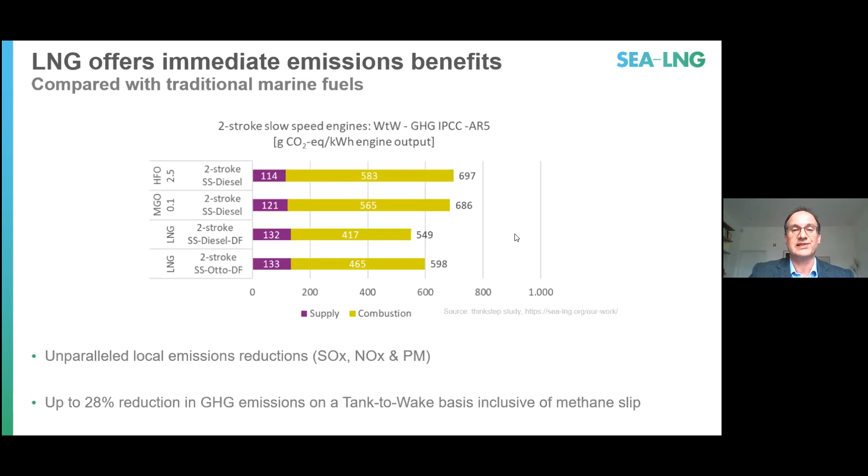But as we all know, regulation is tightening. On the international stage, the IMO, which is the body that regulates the global shipping industry, committed in April 2018 to decarbonisation targets consistent with attaining Paris temperature goals. So a 40% reduction in CO2 intensity for international shipping by 2030, pursuing efforts to about a 70% reduction by 2050.

At a European level, policymakers in Brussels are attempting to push shipping's decarbonisation even harder. So targeting a 90% reduction in greenhouse gas emissions from all forms of transportation by 2050, looking to include shipping in the European ETS, I think by 2023, and this is significantly in advance of any plans the IMO have for market-based mechanisms, and looking to incentivize a move towards zero-emission synthetic fuels such as hydrogen and ammonia.

So what's the role for LNG in all this? Our analysis shows that LNG plus ongoing design and operational improvements can meet the IMO's 2030 decarbonisation targets for new builds. So that's very positive news. But if we look longer term, as the emissions reductions targets become more stringent, then further reductions will require some form of lower carbon fuels. And this is where BioLNG is of specific interest.

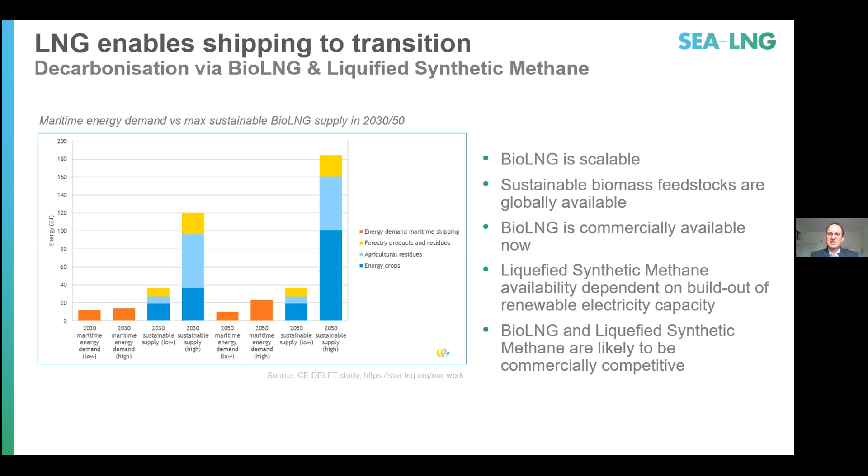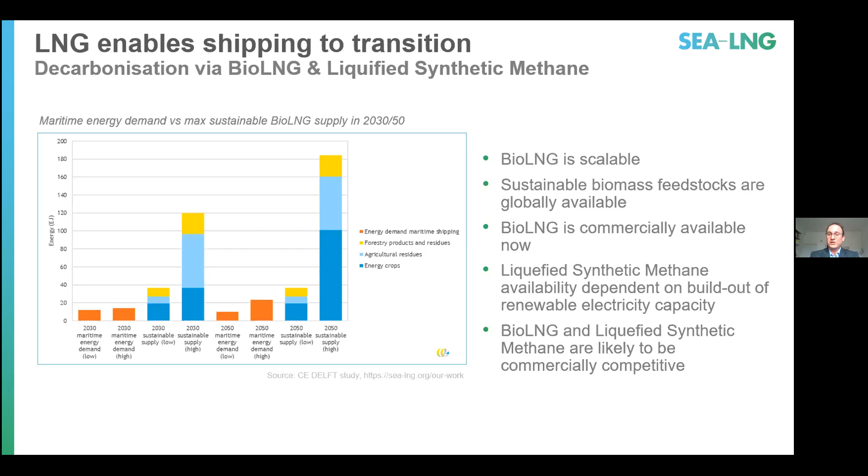Longer term, liquefied synthetic methane: the point that I want to mention here is the molecule is identical. It's available on the build-out of renewable electricity supply, as are other synthetic fuels such as hydrogen and ammonia. And then in terms of cost, BioLNG and synthetic LNG are very likely to be cost competitive with other synthetic zero emission fuels that are being discussed at the moment. So we've seen that BioLNG has a vast potential for shipping and clearly other sectors.

What needs to happen for it to realize its potential? Here are some general regulatory principles that we are promoting as an industry. We think clearly that regulators need to adopt a technology neutral approach so that we can guarantee a true level playing field between different mobility solutions. Alternative fuels need to be evaluated on a full life cycle, and for shipping that means a well-to-wake basis. There's a lot of discussion about hydrogen and ammonia as alternative fuels, but if those are simply produced from fossil fuels, then they will have higher overall greenhouse gas emissions than conventional marine fuels such as LNG.

Regulators need to effectively recognize and incentivize the role of BioLNG for shipping's decarbonisation, and more generally point biomethane at those harder to abate sectors where there are no obvious alternatives, such as electrification through solar and wind power. We need to bring more sustainable feedstocks into the scope of Europe's Renewable Energy Directive, such as residues that can't currently be used and secondary crops.

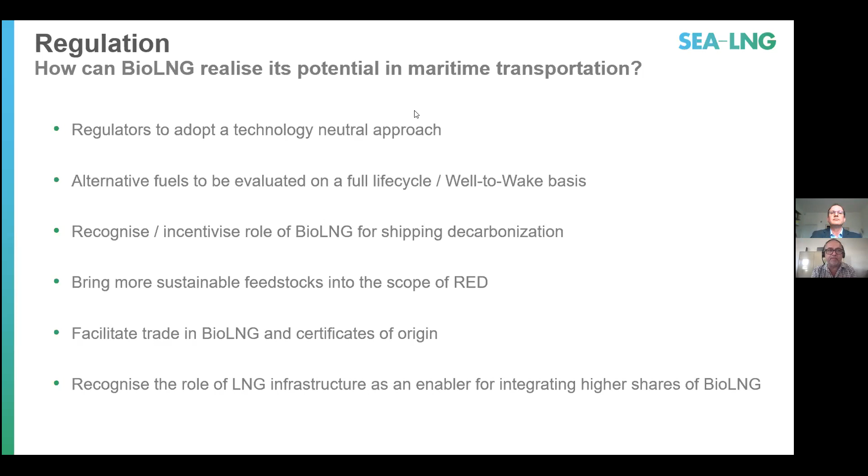So now that leads on very nicely to Michael Schopp, who is the commercial director for marine at Titan LNG, and can give us his point of view and his experience from actually handling LNG and how he also sees BioLNG fitting into the equation for the future. Okay, Michael, I'll hand the microphone over to you.

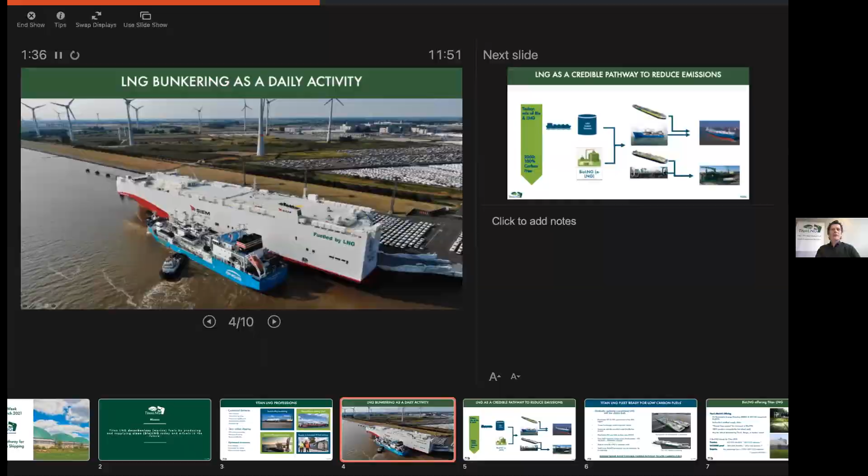Michael, excuse me, I'm just going to jump in here for a second. Would you be able to just launch the PowerPoint from the icon at the bottom of the screen so that we get the full picture? Like you're doing a full screen. Yeah, I was doing that. Is it better now? Well, we can see the notes as well. Okay, that looks almost there. Try again. Sorry for this. That's all right. If you click on share screen at the bottom, it should give you the options of different screens. Sorry. Don't worry, that's not a problem. Otherwise, I can bring it up if you like.

I seem to have lost it completely now. I'll pull it up because we have it, of course. Sorry, I'm working on two screens. Okay, are you there? It's just opening for me as well. Sorry to interrupt you like that. I'm not even sure where my entire PowerPoint went to. Maybe let me bring it up for you. Then you allow me to take the screen and I'll launch it myself. So I stopped sharing. Okay. What can you see? Can somebody confirm that we can see the full screen?

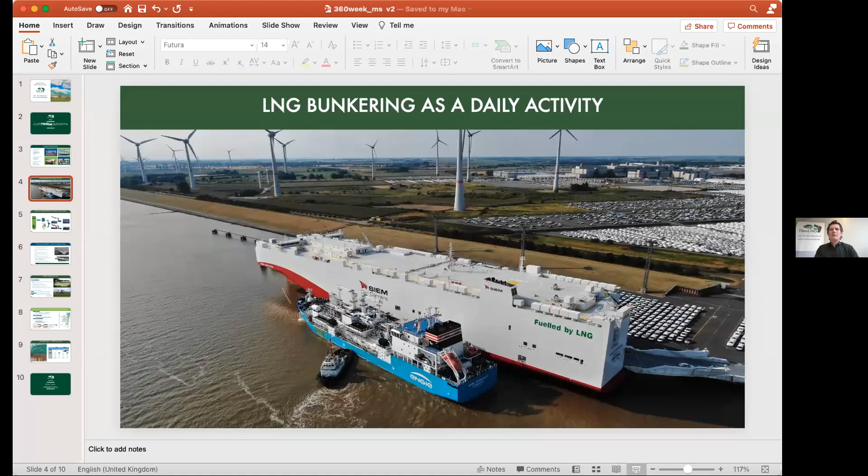Oh, I can see mine again. Okay, shall I try to share mine again? I think we're good now, Steve. Sorry, Michael. So can you see the screen or not? Yes, but it's not on full screen. Shall I try once again? Let's do that. Perfect. So share screen. PowerPoint. This one. Share. And there we are. Well done. Thank you, everybody, for your patience. Over to you again, Michael. Hopefully it's okay now. My apologies for that. So where was I?

And we have started to supply LNG as a marine fuel for the last 5 years, developing various propositions for small scale, which is also applicable for bio LNG. I will explain that in a little bit. The truck-to-ship bunkering, which is more for inland vessels. We have bunkering with dedicated inland waterway bunker barges, and we have the larger scale ship-to-ship bunkering for ocean-going vessels at various locations. We have now brought on board a team as well, looking into the bio LNG proposition.

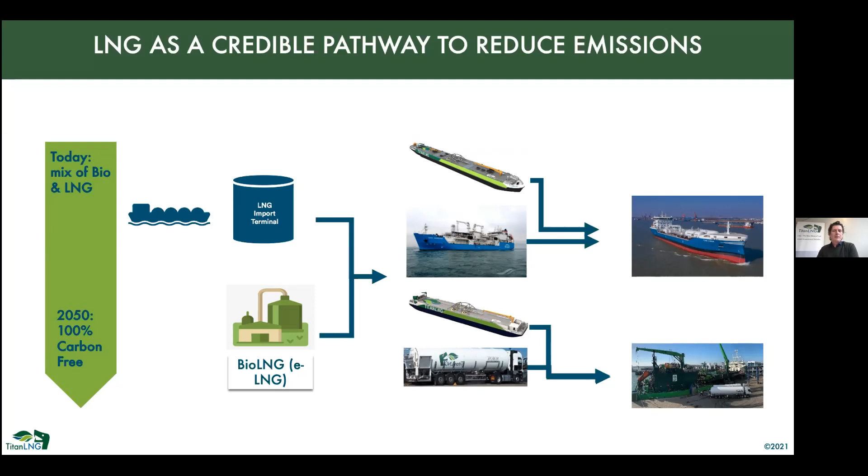And so a government gives the contract to this green, literally green vessel on the basis of their carbon footprint performance. Once it is of scale, we start including it into the larger assets that we currently have on the water, and start supplying it to the larger vessels that require a real ship-to-ship transfer, because the trucks are just way too small.

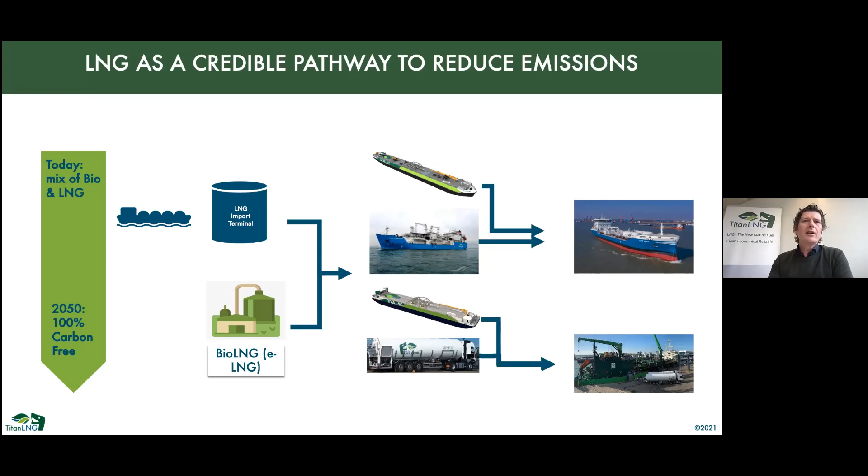The beauty of the LNG infrastructure that is currently there. On the top right side, you can see our two barges really next to each other. The Flex Fueler 2 has been christened one hour ago, so she's officially in operation. The beauty of these barges is that they have multiple tanks on board. So the idea here is that we start allocating storage capacity inside our barges to accommodate physical bio-LNG streams. This has also been recognized by the European Union, that this concept is actually quite workable to scale up the bio-LNG delivery promise to the marine market.

The Flex Fuelers, because they have the four tanks, can accommodate these bio-LNG streams via trucks. So trucks can discharge into our barges, and then we can bring it to the vessels that require LNG as a marine fuel. That application with the trucks sounds a little bit difficult, but it is a way to scale up with the market, because you can't start discharging trucks into large vessels for the bio-LNG. So the Flex Fueler is a very nice intermediate storage solution where you can aggregate sufficient volumes that can be brought to the final receiving vessel.

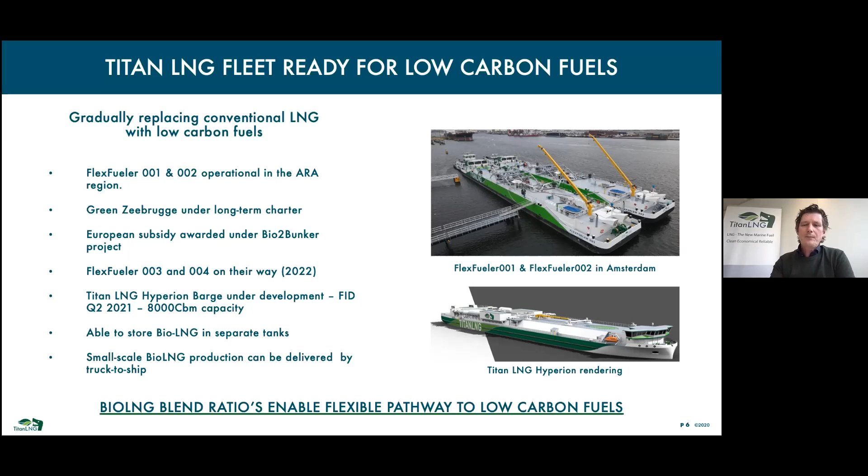So what do we do on the bio-LNG? Of course, we want to be on the forefront of making sure that we end up delivering the right products to our customers. For that, we have taken great effort to make sure that we have all the certification in place, end-to-end certified for the entire supply chain. Also, we've intensively looked at the compatibility. So conventional LNG with bio-LNG, how can that be mixed? In other words, how compatible is it? We have not found any issues on that, and the engines of our customers should be able to accommodate these bio-LNG molecules safe and sound.

So how do we start to bring up this blend ratio? That's by offering tailored solutions in accordance with the needs of our customers. How much bio-LNG would they like to introduce into their fuel mix in order to offset their emissions? So we can go from what we call a B10 to 100% bio-LNG, depending again on the customer needs.

In order to be a credible supplier, we've taken the steps to make sure that we have the end-to-end process in order, and we have recently obtained the ISCC certification, which we're quite proud of, and therefore give our customers comfort that they will get the right product on board, and that they will not be faced with any issues after delivery has taken place.

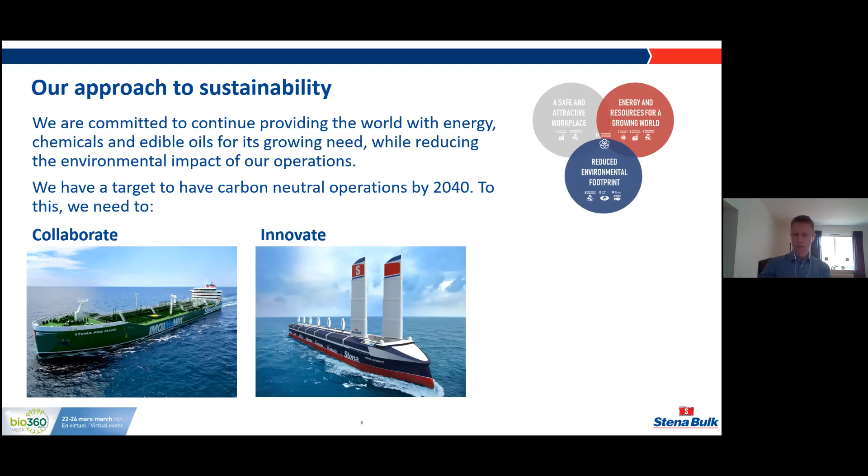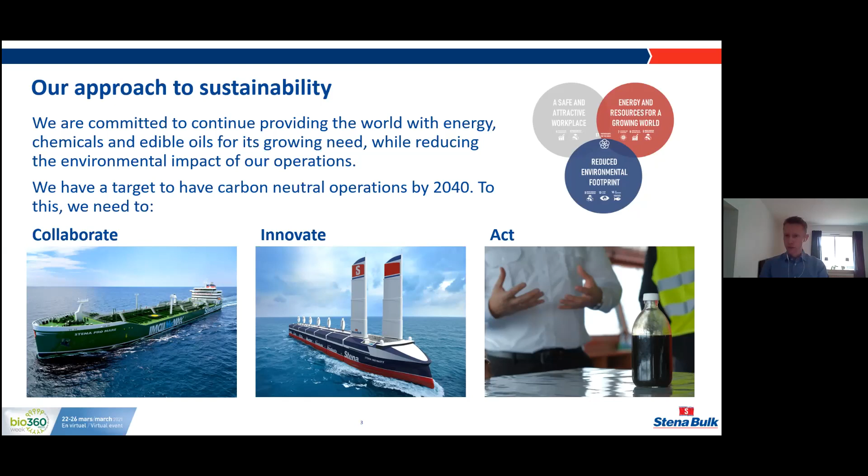And all of this is going to be needed, we believe. But there's one really, really critical thing that remains, and that is that we need to start acting now. We can't really wait for new technology and new zero carbon fuels to be commercially viable. We need to see what we can do now with the fleet that we have in the operations that we're currently in. And that's really where we see biofuels fit in very nicely.

This is the Stena Immortal, one of our product tankers carrying oil products and chemicals and vegetable oils around the world. But she was also the first vessel that we ran on biofuel. This was about a year ago. We did a trial on a 10-day voyage from France to Rhode Island. And what's so special about that? We're not the first one doing a biofuel trial, certainly not. We wanted to stretch it a little bit.

We did it on 100% bio, and we also did it in regular commercial operation in fully loaded condition, meaning that we didn't really change anything from our regular operation. We didn't take the ship off hire and do a separate trial. We did the trial as part of our operation. And the point of that was that we wanted to prove that for us as a ship owner, the only difference between biofuel and conventional fuel is the environmental footprint. That was kind of the whole point. We shouldn't have to change anything else to be able to run on bio.

That was the approach. Of course, supervision and testing, a lot of that we did, but otherwise we didn't change much. The conclusion was that, yeah, that was exactly the case. There was really no difference. The engines performed on par with conventional fuels. There was no tear. There were no residues or soot coming out of the exhaust. We didn't have to change anything operationally. We did a second trial a few months after on a different fuel, a blend that time, to try that out as well, and the conclusion was the same. So for us as a ship owner, we are very confident that biofuels work.

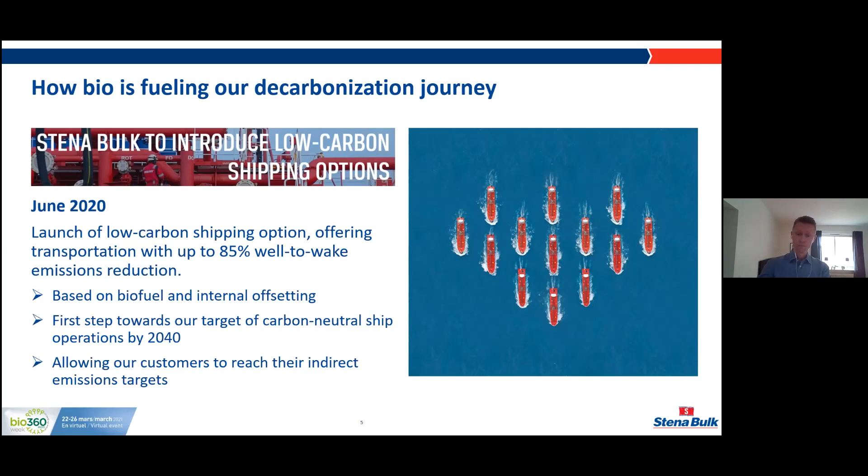Peter, thank you. Oh, sorry. No, I'm not done yet. I just had an artistic pause.

I want to talk a little bit about methanol as well. We do believe in methanol as a fuel, and as I mentioned earlier, we have the collaboration or the partnership with Proman. There are a number of benefits with methanol as we see it, but if we stick to the environmental side of things, it is biodegradable. It is clean burning in the sense that the SOx and the particulate matter is reduced dramatically, and also NOx levels.

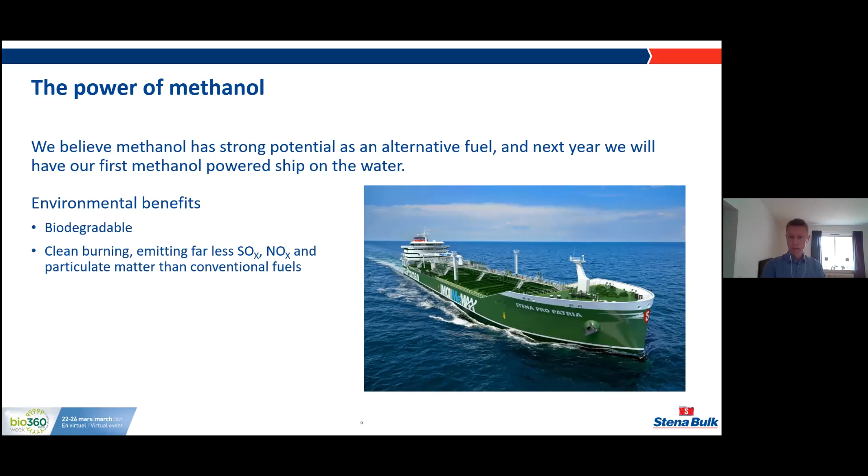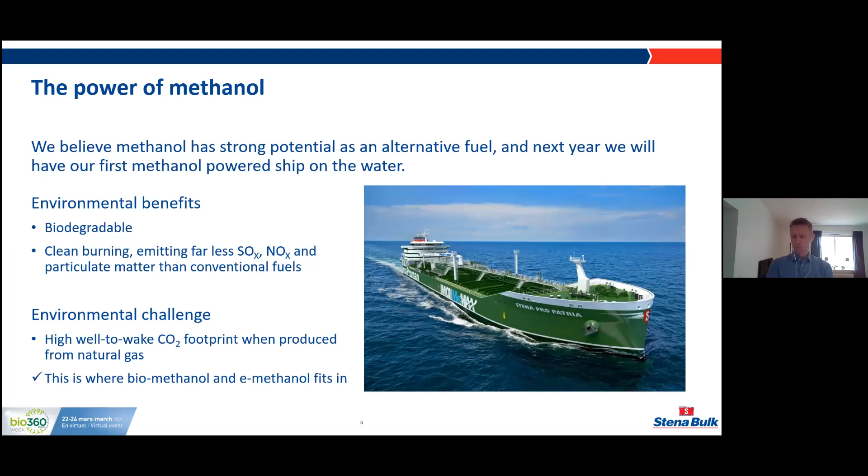The challenge from an environmental perspective is the carbon dioxide. We know that there is less CO2 emitted from combustion of methanol compared to other fuels, but over the life cycle, it's still significant. And this is really where bio and e-methanol fit in. And the way we approach it is when we look at alternative fuels in general, we try to look at it in pathways. So not looking at methanol and biomethanol and e-methanol by themselves, but seeing it as a whole.

And doing it that way means that we can start investing in methanol ships. We can start and build operational and technical experience, because we know that methanol is solving a number of problems for us now, and will solve even more problems when we eventually can scale up the bio and synthetic methanol. And same thing with methane or LNG, as discussed by the previous presenters.

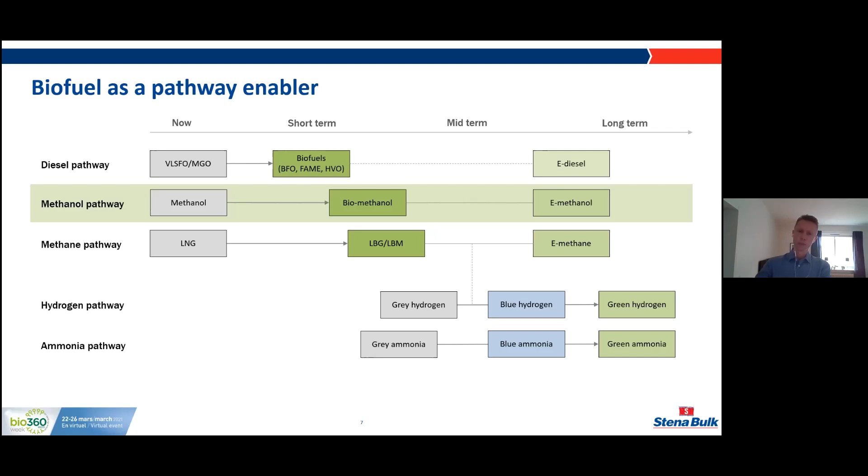So in conclusion then, when we talk about biofuels as an enabler, it's primarily three things that we're talking about. One, it allows us to act now. We don't have to wait for new technology or new fuels to be commercially viable. We can start reducing our emissions now. And we can't, to be fair, really afford to wait 10 years or 20 years to start that voyage. So I think bio is playing a key role in that respect.

It also opens up for multiple low carbon pathways, as mentioned. Methanol is one, LNG is one, which means that we can start taking active steps now. And then finally, I think biofuel actually has an important role to play in that it shows that decarbonization isn't 10 or 20 years away. It's something we can do now. And I hope that can also push development and investments in other options when it comes to low carbon technology and fuels as well.

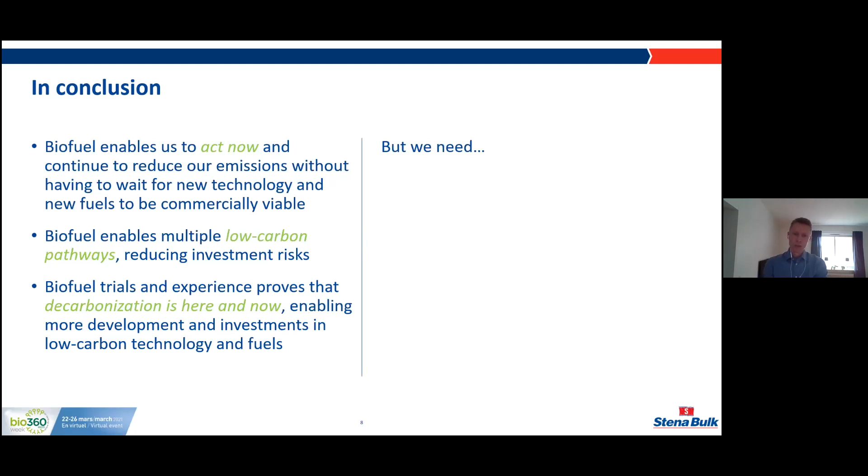For it to really take off though, and now I'm not talking about Stena Bulk specifically, but more in general for ship owners to start looking more into bio, there are a few things that the industry will need, I think. I like to talk about shipping appropriate products. Of course, we need more products. We need more fuel available for us. When I say shipping appropriate, I mean that we need products that are high quality, but not necessarily fancy. Right? Our engines can take a lot. We need quality, of course, but we don't need HVO.

And that, of course, also has to do with pricing. Pricing and also availability, I think, are key concerns, not only for us, but for others as well. Can we really rely on having enough to be able to continue our operation running on bio? Same with certification. Happy to hear that Titan LNG now has certified their products. I think that is really, really important, and standardization as well. That also leads into the regulatory clarity that is also not quite there yet, I think. Especially the question of what is regarded as sustainable and what is not.

So those are a few things that I think we need to continue to work on together, and we are happy to collaborate with anyone around those things as well. But again, the potential is there, and we're going to focus continuously on bio as one of the pathways moving forward.

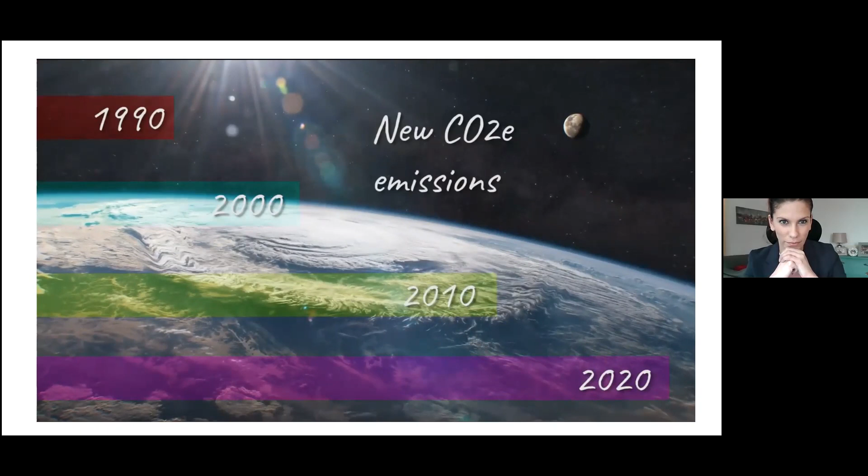A domestic flight, for each kilometre travelled, for every economy passenger, will release 250 grams of new CO2e emissions. That's a single passenger travelling just 1 kilometre of a single flight. Last year alone, humans released 43 billion tonnes of CO2e emissions into the atmosphere, and it's growing fast. Once-in-a-generation storms occurring annually. Record forest fires sweeping across our rainforests. Up to 150 different species becoming extinct every day.

In the future, the world must transition to carbon net zero energy forms. But tonight, from midnight, those 100,000 flights will still depart, and 75,000 cargo, cruise and fishing ships will continue to set sail. So, what if there was a solution to clean them all from tonight? What if we could take the 8 million tons of waste plastic destined for our oceans and turn it into an ultra-clean fuel that reduced CO2 emissions by 75% and zeroed out the sulfur oxides? What if there was an immediate solution?

So welcome to Clean Planet Energy, and a couple of important points regarding this video. First of all, I think we are all aware of the emissions that are associated with transportation. And this is why we're all here providing solutions to both industries, the aviation and the marine sector. But also it's very important for people to realize and understand the importance of global trade, and that it has to continue with as little disturbance as possible. And this is why it's important to provide both industries with immediate solutions.

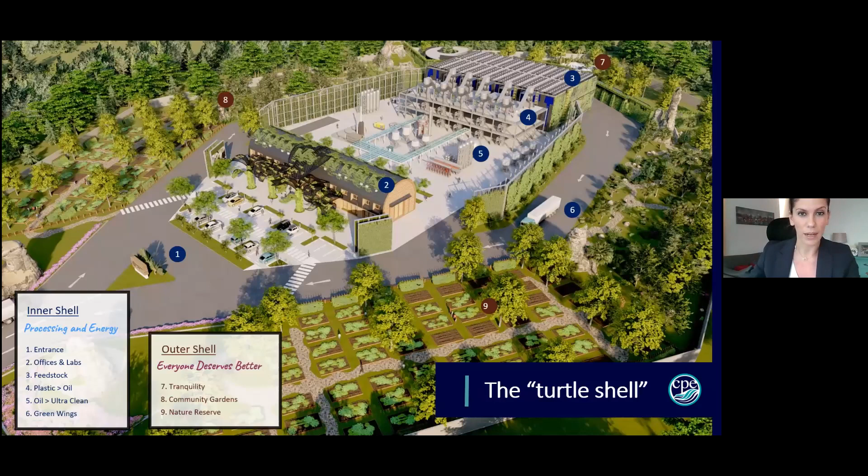Now, our eco-plants are built using our trademark design, the turtle shell. The turtle around the world is associated with good health, long life, and nature. And these are the qualities that we strive for with each of our eco-plants. And I hope you will see from the designs here that the way they look and feel is so much different from the traditional plants that people are used to seeing.

Now, the inner shell is where all the magic happens, where we have our processing facilities and the energy. And the outer shell, which is 30% of our investment, is all about nature. So we build gardens, tranquility gardens, community gardens, nature reserves. And the reason why we do that is that when we go and talk to the local authorities about building eco-plants, we want them to be part of the solution. And that's the reason why we build them so different from the traditional plants.

So how it works. Every day, each plant will use 60 metric tons of non-recyclable waste, which is going to be shredded and fed into the facility. And within our facility, we have a two-stage process. In the first one, in an oxygen-free environment, the plastic hydrocarbons are broken down into smaller chains. And then in the second part of the process, those chains are upgraded into new products. And at the end, we have liquids, gas, and solids. The important thing I want you to remember here is that this is not incineration.

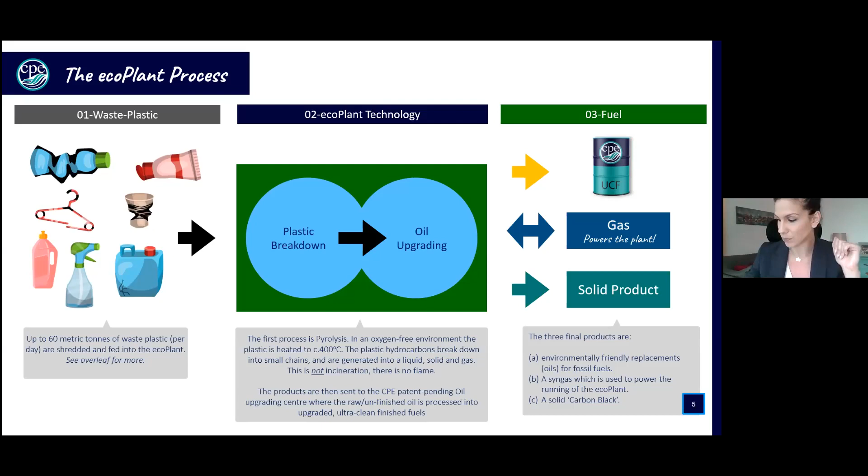There is no flame in this process, which is really important when we talk about emissions. And I'll touch on the products in detail in the next few slides. Now, in terms of the waste plastic, we accept almost any waste plastic, and it's really dreadful to see that 50% of all UK and Europe's waste goes to landfill or incineration.

We do not want to intervene with plastic which has a clear mechanical recycling path. We're not interested in this. We're interested in different types of plastic that would otherwise end up being incinerated or in landfills, or even worse, in the ocean. And the key thing is that in our process, we can take plastic that is contaminated, that wouldn't otherwise be recycled mechanically.

Now, a bit more about our technology. The first picture you see, and maybe I should have it a bit bigger, is the feedstock. This is actual plastic that we have used to produce our fuels. So as stage one, we take the non-recyclable waste plastic and we convert it into pyrolysis oil. Now there are different stages that follow.

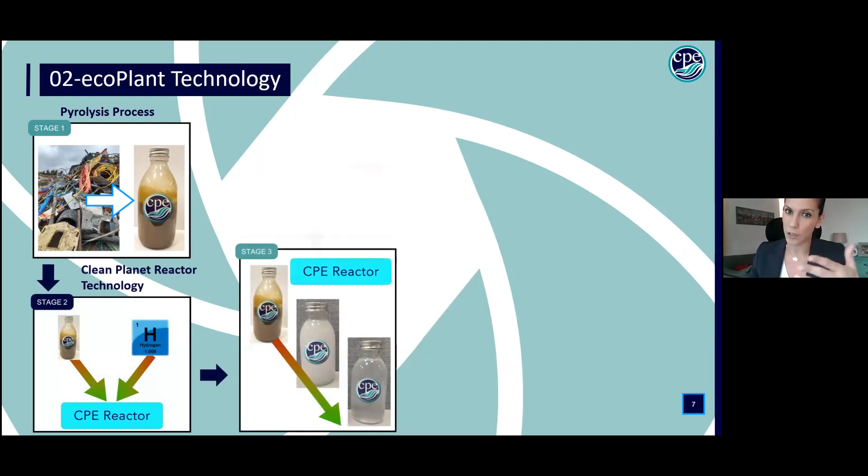In stage 2, we take the unrefined pyrolysis oil, which is mixed at pressure with hydrogen and fed into our patent-pending Clean Planet reactor technology. The pyrolysis gas that we generate goes back to power the plant. The plant is powering itself from the gas that we produce. In stage 3, inside the reactor, the unrefined oil is converted into hydro-treated clean fuels. And then in stage 4, we remove things like sulfur, nitrogen, heavy metals, and do the hydrocarbon saturation.

And then we end up in stage 5, where we're past the reactor. The oil is fed through to a single stage distillation column in order to separate the different types of fuels. Now, what we have managed to do in Clean Planet Energy is to offer a range of different modes. We can have plants that focus on producing naphtha with a smaller part producing diesel or jet fuel, or a mode that focuses more on producing diesel and less naphtha. So we provide the flexibility to meet market conditions.

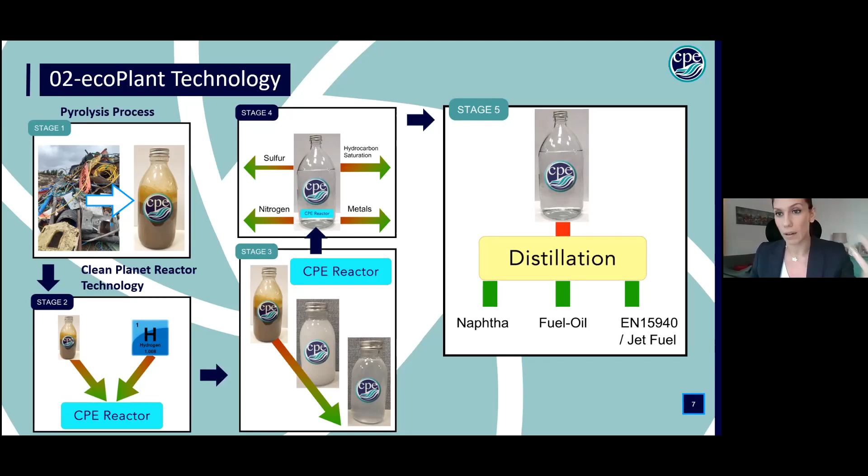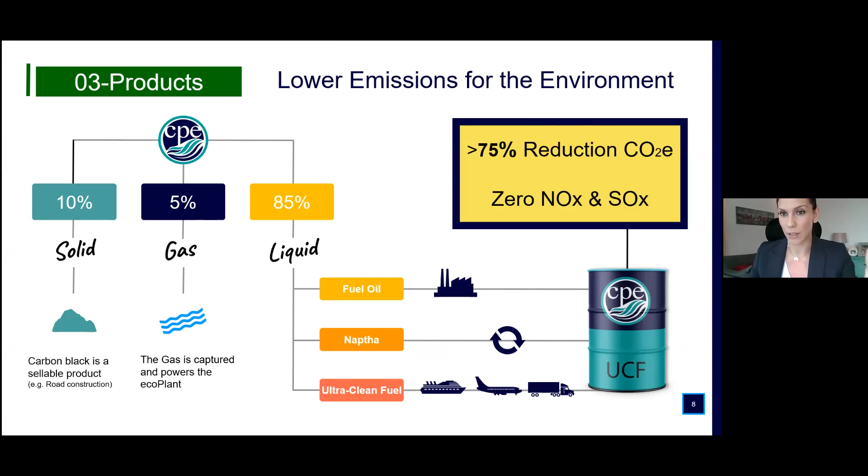And the design of the plant is such that we can switch from one mode to the other relatively easily. It will take us like 1-2 weeks to change the mode. We talked about the gas; for the solids, we also produce carbon black that goes back to the construction industry. In terms of the liquids, we have the fuel oil, the naphtha, and the ultra clean fuel with over 75% reduction in CO2. And I'll touch a bit more on the emissions in the next few slides.

So EN 15940, this is our utmost premium fuel for marine and road usage with the highest eco standards. In CPE, we have decided to have a very transparent and open conversation with the public. So I would really encourage you to go to our website where you can download the high-level specifications of all of our products. And we have received SGS certification of all of the products that we have managed to produce.

So the remainder of liquid products not used for fuel is recycled back into naphtha. And then this naphtha is sent back to make circular plastics again, or provided to petrochemicals for manufacturing of household goods and other products.

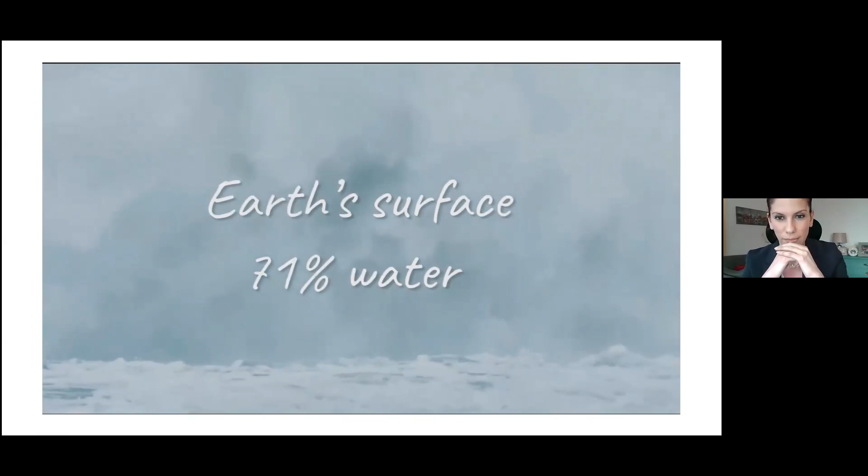Look out. To the oceans, to the seas. Look out to the vast expanse of relentless currents that cover our planet. They bring the never-ending tides that connect us. They birth the joys of life. Look to the loneliness of life in the deep blue. The ships that sail there are the arteries that sustain us. The essential goods that they bring cannot be replaced. Through the night and day, they are not going away. Yet look to the life that they route. Look to the pollutants and waste that they give out. The equivalents of millions of cars for every journey they take. The choking waters and warming skies at stake. There is yet no real alternative. Look, these emissions are just not going away. Or so they say.

So Paul, I hand over to you. Katerina, thank you very much. Fantastic. I feel it's safe to say that CPE is today a solution provider and will definitely be part of the solution providers for tomorrow. So congratulations, and we look forward to seeing you progressing in the future. Thank you very much, Paul.